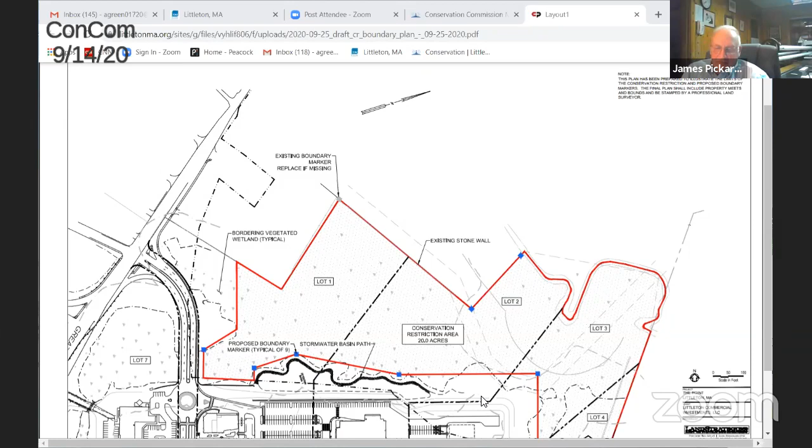Is that something where at some point we'll need to provide a kiosk with a map or something somewhere? I'm just curious. I agree. The one up on the west is way low on my list of places that need signage. And then, what if anything happens along here and into Westford? There will need to be probably a trail sign. I don't think it really needs a kiosk. Okay. Those are my only concerns. Anybody else got anything?

So I think last time we talked a little bit about the Phragmites and the invasives that were taking over. Has anything changed with respect to the ability to address that at some point in the future? I don't know. I'm working on the conservation restriction, Julie, but I will ask the engineer what's going on with the Phragmites. Well, there's no proposal to treat them, but it is, remind me if I'm wrong, Ray, a provision in the CR that an allowed use is control management of invasive species or vegetation management.

Every conservation restriction I write allows for the control of invasive species. So it's an allowed action. There's just no plans right now. Correct. Okay. That was my understanding, that there wasn't a specific plan at this time to manage invasives. I just wanted to double check that the provision was there. So thank you.

Does the brook run through there someplace? I don't see it on the map. It runs pretty much right through the middle of it. Yeah. Is there anything written in the CR that would allow, if ever needed, the town to go in with mats or anything, or to clean up a spill? We had one spill up on 495 a couple of years ago.

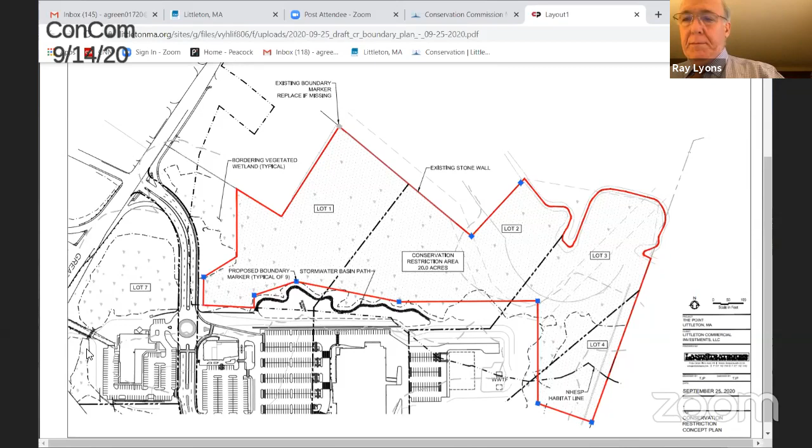So I think, do you need a vote tonight? Or probably should take a vote tonight to approve this? That would be helpful. Sure. Dated September 25th. Somebody want to make a motion to approve this? I'll make a motion to approve the conservation restriction prepared for the point dated September 25th, 2020. And that would be for the plan for the conservation restriction. For the plan for the conservation restriction.

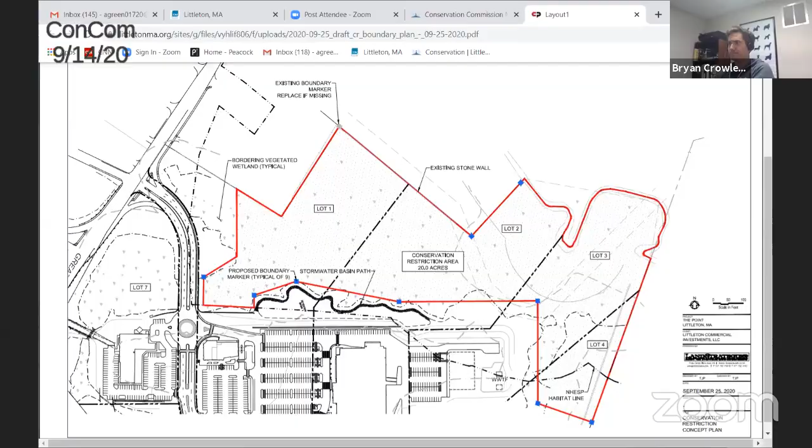Do I hear a second? I'll second. Oh, go ahead. Roll call. Carl, aye. Sarah Seward. Sarah, aye. Jim Pickard. James Pickard, aye. Julie Rupp, aye. Kyle Maxfield, aye. And Bryan Crowley. Bryan Crowley, aye. Unanimous. Thank you, everyone. I really appreciate it. We'll keep this rolling.

Okay. Request for a certificate of compliance, Bennett Orchard. If I may, there is someone here from, I'm sorry, is it the Friends of the Library, who wanted to talk about a land use permit for the storybook. They did one in August, and they're planning on doing another one for basically Halloween.

Katrina, did you want to just run through, is that okay? Yeah, I can definitely talk to it if it's okay. Is it okay to go now? I don't want to mess up your meeting order. Go ahead. Jim, is it okay if we stick her in there? Yeah. Yes. Okay. Go ahead. Thanks, Katrina. Thank you for having us tonight. I know it's an addition to your schedule.

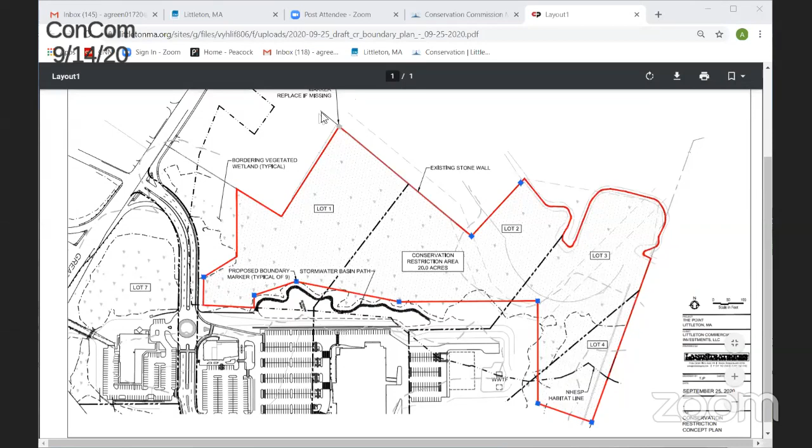Jim O'Neill's also on, and he contacted the Friends of the Library to see if we could collaborate and do another story walk. So last August, we held two story walks, one in Hartwell and one in Cloverdale. So a story walk is where you put picture books in frames and people can read them as they hike the trail. And so Jim proposed we do one October 31st to November 1st in connection with Halloween.

So Friends of the Library would get the frames and put the picture book. Diane Haddock has a Halloween themed book in mind and ready to go if this is okay. And then Jim O'Neill mentioned that LCT was planning to ask people to do carved pumpkins, and they would have some candy at the end to distribute to anyone who participated.

And last August, in all of our advertisements about the story walks, we made sure people knew to wear masks and keep their distance and sanitize their hands. And if the parking lots were full, we asked them to return. And there was a large number of people who we saw, we got selfies from and things like that, who participated. It was really fun.

And so those walks were each one day. And the one feedback we got was that people wished they were up for longer. So this request is for a weekend. So October 31st is Saturday and November 1st would be Sunday. So we set it up on the Saturday and break it down on the Sunday. Out of curiosity, how did the parking arrangements go the last time?

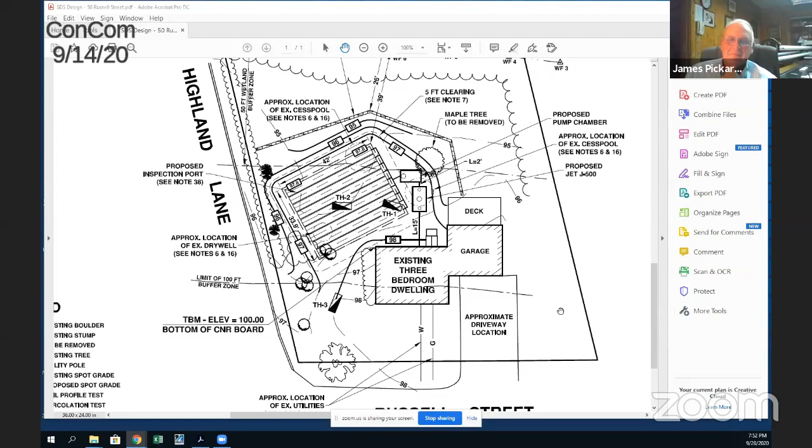Okay, so I'm Kevin Ritchie. I'm here on behalf of Janice Plummer, the owner of 50 Russell Street. She has a failed septic system. She's not moving. It's just been backing up into the house. The existing system is in the groundwater. So 50 Russell Street is across from the middle school. It's on the corner of Russell Street and Highland Ave, or Highland Lane. So we've got a wetland across the back property line. It was delineated by Matt Morrow last spring. We've got the 50-foot buffer and the 100-foot buffer.

We tried to move it outside up into the front yard here. You can see the size of the system's rather large. We did use some advanced treatment. We're using a jet and a geomat both to reduce the size of it to make it fit the lot. Obviously, it doesn't fit in the side yard or the front yard. So we pulled it as close to the house as we possibly can. Here the system is 39 feet from the wetlands at its closest point. We've got some erosion control, some straw wattles and silt fence. And that'll be 26 feet off of the wetlands.

The existing tank is here. It's got a cesspool here, and I believe it's probably been added on to and something out in the side yard as well. I've got one tree in the middle of the backyard that'll have to be removed, and then there are some shrubs down along the side which may need to be trimmed back. Got a couple of little clumps of trees here and here as well that'll be removed.

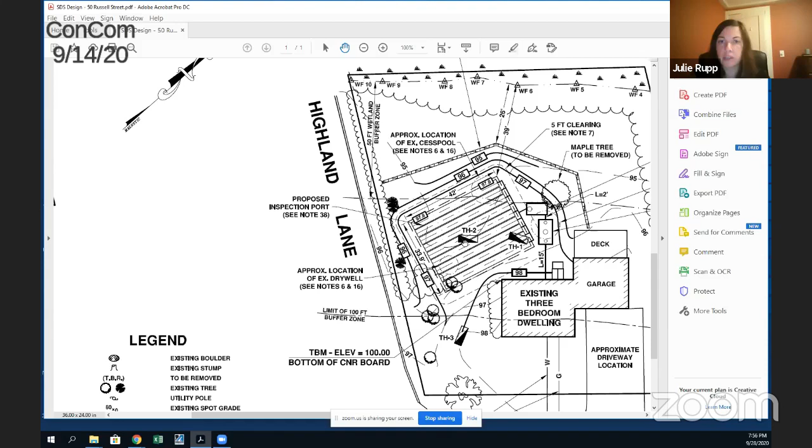So is the mound going to be high enough? I'm just thinking July, I mean, we've been in drought conditions. Yeah, no, so there was about 3 feet of fill on the ground surface. So the water table was in the fill, so we couldn't get deep enough into the natural soil to actually run the perc test.

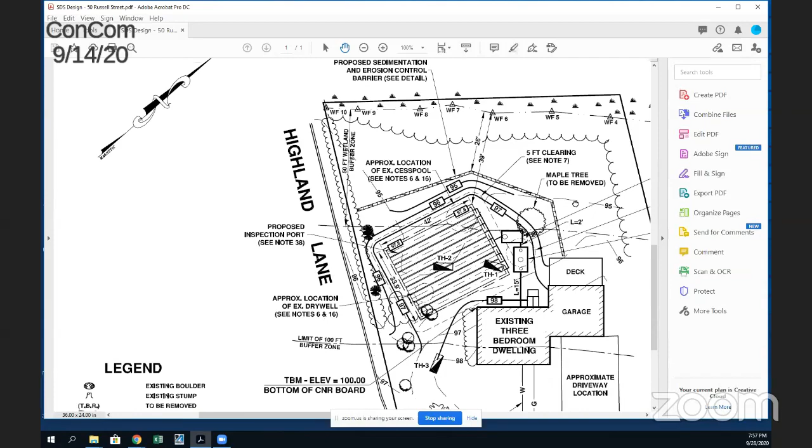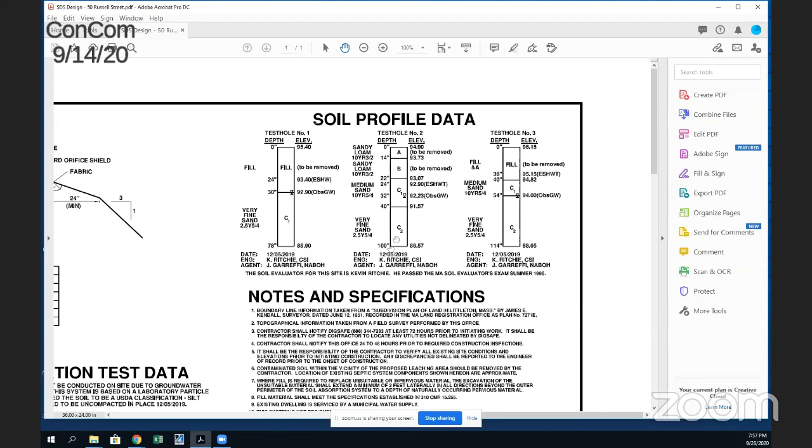The top right corner of this plan, Julie, you can't see it on that, but I pulled it up. It shows the cross sections of the test holes they did. Yeah, so you can see these are the 2 test holes that are in the system. The first one we had 2.5 feet of fill, and then the very fine sand. Here we had roughly 2 feet of topsoil and subsoil. Then we had a sand, but we didn't have enough of it to be able to perc it. So we're back into the very fine sand. Again, that was down below 3 feet. Okay.

So basically, this is a repair then, right? Yes, this is an upgrade. They're not adding any flow. They can't do anything to the house. They're not moving, they're not selling it. They're just having a problem with the existing system. Yeah, it looks like there's really not much choice on this site. No, there's not a lot. It's a big system, and there's not a lot of room. The only room is closer to the wetlands. Right. There's not enough space on the other side of the garage, not enough over here. We thought maybe we could squeeze it in the front at one point, but it just doesn't fit.

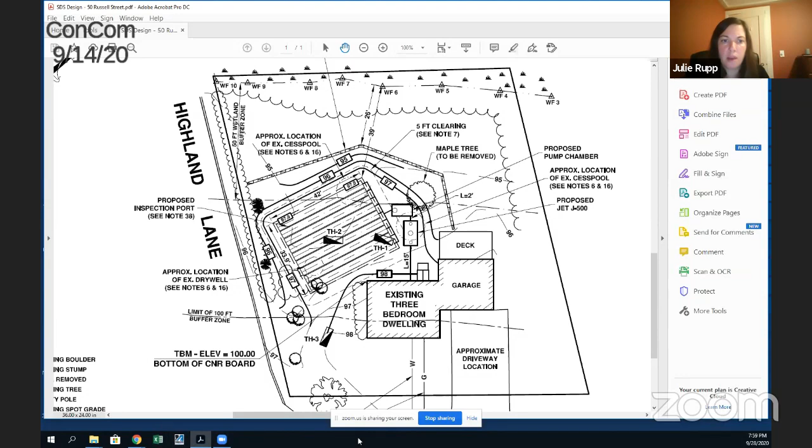All right. Well, I'll make a motion to issue a waiver and an order of conditions for a septic replacement at 50 Russell Street. I don't have the file number in front of me, if anybody wants to... 204915. With that file number.

Do I hear a second from anybody? Don't all speak up at once. Second. Yep. Well, we're muted, so yep.

A roll call. Carl Melberg, aye. Sarah Seward. Sarah, aye. James Pickard. James Pickard, aye. Julie Rupp. Julie Rupp, aye. Kyle Maxfield. Kyle Maxfield, aye. And Bryan Crowley. Bryan Crowley, aye. It's unanimous. Okay.

The only question I got is when do they plan to do this? I think they'd like to do it as soon as possible while it's still dry. So if they could, they'd probably start tomorrow, but they're probably a week or two out anyway. Okay. But Janice is extremely anxious to get it started and finished. I think it may be good timing. Well, the sewage is backing up into the basement. It's certainly time. Yep. Good luck. All right. Thank you. Appreciate it.

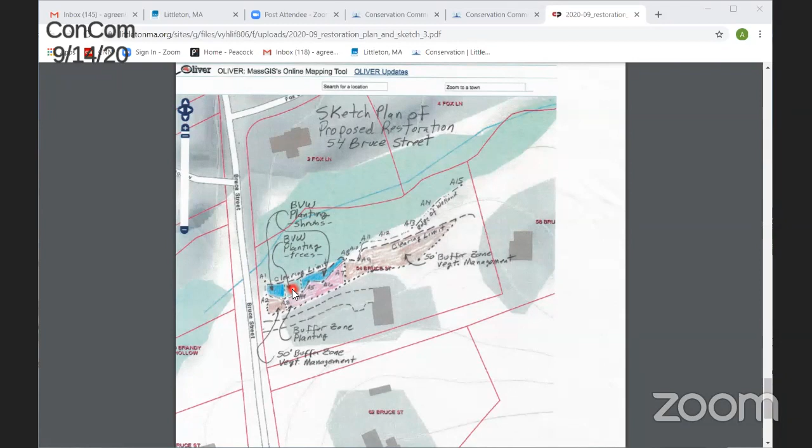And then in that square where it's lighter blue, we're really lacking the canopy cover as well. So in that block I specified planting with some wetland tree species. Then to go along with all of this, in the rear but also in these front areas, I think the key is keeping the invasives out as the plantings and the native vegetation get established, which is coming back in the areas quite quickly.

I was surprised. I was out there in July, I think, and again a couple of weeks ago, and there's some really extensive areas of things like swamp dogwood that have already popped up, which has really only happened over the last several weeks. I think that's my summary.

What's your recommendation, Amy? It looked like a very complete plan to me, and it does include some long-term maintenance, which you can see in there too. So the order would have the continuing condition that he can go in and do some pruning and cutting and removal of invasives as they continue to pop up. Yeah, I would think they would have to keep on top of cutting the invasive stuff. That just keeps coming. Anybody else got any comments?

Yeah, I agree that controlling the invasives is something we want to help allow. I'm just wondering if any education has taken place on which plants are the invasives, just to make sure the homeowner doesn't run into issues again, because they thought they were doing something beneficial and didn't realize. So I'd like to suggest that maybe Chuck could provide a show and tell, or if it's part of the maintenance, or maybe the first time it's time to prune invasives, we go look and clarify what's what.

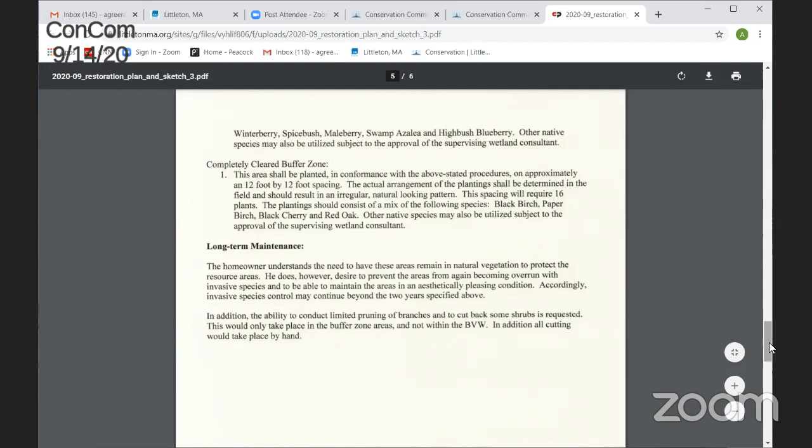Well, we're supposed to get an inch of rain Wednesday? Mm-hmm. I think that's what's in the forecast. Yeah, tomorrow night into Wednesday. Yeah. I hope we get it. Even though I just painted my deck.

What do you want to do, folks? Okay this and keep tabs on it for 2 years? I think that sounds reasonable to me. Carl? Right, I agree. Yep. So you want a monitoring report at the end of the growing season? Yeah. Yes. And that Mr. Karen be present during the installation? Sure. I think that makes sense since it's his plan. Somebody want to make a motion to go forward? Let this go forward, please.

And I guess this needs a waiver too. I guess, I don't know. I suppose it does. For restoration, and working within 50. Come on, folks. Somebody make a motion, please. You can say so moved. So moved. There you go. Hear a second to it? I'll second.

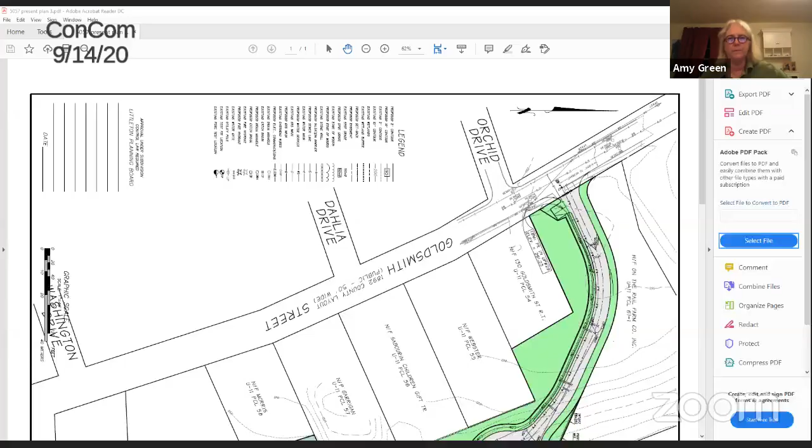Hopefully at the bottom of your screen, it should say share screen, a little green. Yeah, I see share screen. So if you click on that. Okay, here we go. And then once it's up on your screen, you can click on it again on, there you go. Okay, but I think maybe what I need to do, does that help? A good start. We'll get a picture here anyway. Can you see what I'm looking at?

Yes. Okay. What you can see there, what's colored in is what was originally submitted with this order of conditions. So what is cross-hatched is what we're proposing. And there are these 3 lots, lot 3, lot 4, lot 5. Lot 3, the house you can see is enlarged a little bit, but it's taken no closer to the wetlands except for where the deck is. There was no deck shown originally. It's still beyond the 50-foot setback.

Lot 4, you can see the increase in the size of the house, and the distance to the wetlands originally was 71.9 feet. That was the closest distance that the proposed house was to the edge of the wetlands. Now it is 57 point something. Let me blow that up a bit.

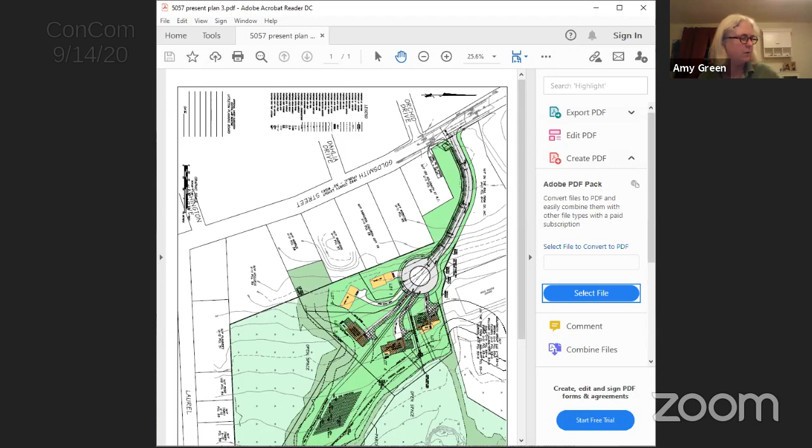That'll be fine. So do you want to send that to me? Yeah, Steve, if you want to look at that, I think we are concerned with things such as sheds and fences. If you want to take a stab at that, that would be appreciated. Okay, I'll take a look at that. If you can just send that to me, Amy, or just tell me where it is. Is that in the bylaw? In the regulations, at the end of the regulations. Okay. All right, I'll take a look at it. If I can't find it, I'll call you. Let me know. Okay. All right, great.

So in the meantime, I'll be allowed to at least submit my plans. If there's any concerns from the commission, then we'll just go on hold. Okay. Great. We'll see you on the 19th.

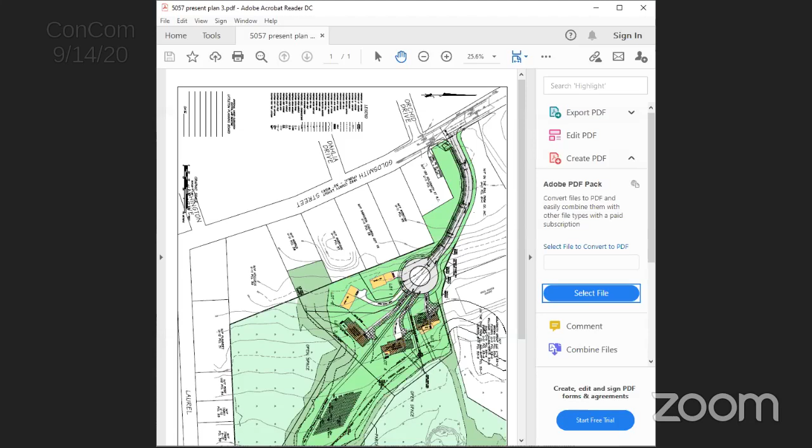Okay. Public hearing, notice of intent, Ayer Road, Mass DEP file number 204-914, MassDOT repair eroded gully. Somebody want to speak to that? Yeah. Hi there. My name is Susan MacArthur from BSC Group, and I'm here with Matt Farron from MassDOT.

At the last hearing, the commission had asked if MassDOT could go out and take a look at the catch basin that's located across the road from the area that's eroding, that gully, as well as the catch basin that's located down the street near the development on the hillside. And so they did, almost 2 weeks ago. They went out and pulled the catch basin grates and looked in, and there are silt sacks in there.

So, that does restrict a little bit of flow, but they were working. So they cleaned them out. They did jet water through to see if the pipe was functional. That does go underneath the roadway and outlets at that slope where the gully has formed. And they did find that it is coming out there. They just couldn't find the end of the pipe, so it was just kind of seeping.

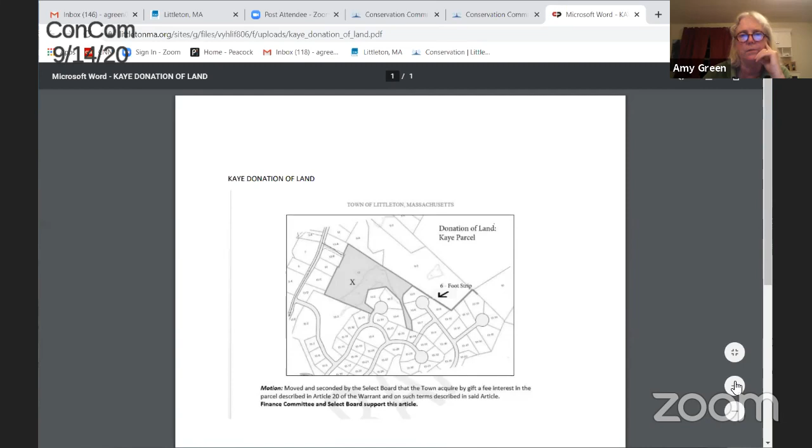The Durkee and Kaye land transfer, I don't think I do have that. It's kind of weird. The Durkee land donation is pretty straightforward. The Kaye land donation, this is Fir, which was phase 1. And then this is Douglas, and that's phase 2. And then phase 4 is down here somewhere. So they'll be donating all this, pretty straightforward. But they're also donating this 6-foot strip of land. And it was in kind of rough shape after construction and they weren't doing anything with it.

So I actually was able to walk it with them on Friday and get them to remove some of the really rough wood chips, and they're just going to reseed it so that if we do need to make that into a trail, we can. The other piece is there's supposed to be an easement right here for a bike trail. And it's really not graded out. It's like right outside this guy's basement door. So there's discussion now of whether they will put it in as Maurin believes the planning board permit read, or if they would leave a bond so that the town could put it in later. Either way, I'm sure that owner's not going to be happy, so I prefer they did it.

But wouldn't it make more sense to have it exit up near where the arrow is, that short piece of property into the circle? Down here? No, up. Oh, up there? Yeah. That's really steep slope. Okay. And it's too late. The easement is set. I think they need to do it. If they opted to put a house too close, I feel as though they should deal with that.

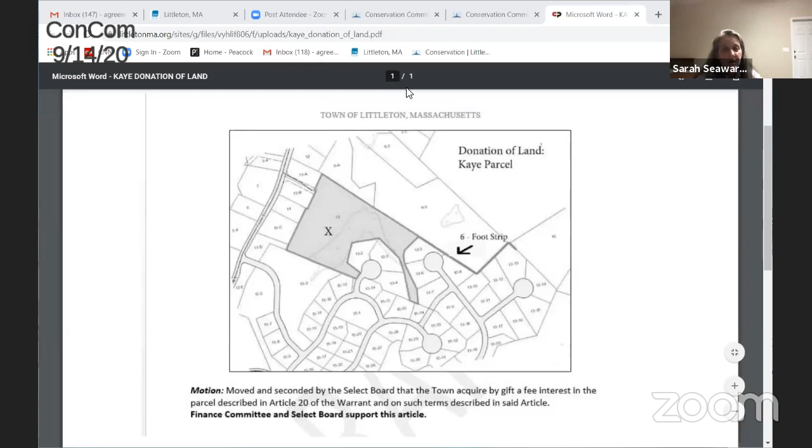Okay. Yeah, and if there's something that's not adequately documented, they're at risk for not being able to substantiate. I'm hoping they have it all surveyed like it's on a plan. Yeah, that makes sense, Sarah. They can plot the house, plot the property, or existing foundations anyway. Right. I don't know if they have lot 40 surveyed, but they have the other 2 surveyed. Okay. All right, I will let her know. Okay.

Do we need to go to the Scott Road update? Well, that's at 9:15. So, yeah, back again on the meadow mowing and haying stuff. Let's start with the mowing thing or the hay licensing. I don't care. I don't know if I just keep this on here. Yeah, I mean, on the agenda for discussion, or? Yeah, just keep it there. Okay, table it.

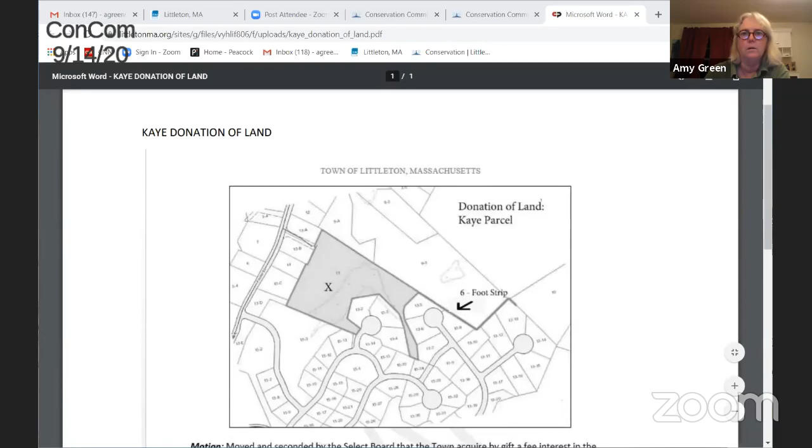How are we doing time-wise, Amy? It's 9:10. This isn't a public hearing or meeting, so you probably could go ahead. Is somebody here to speak to it? Matt is here. Matt Morrow. You guys hear me okay? Yep. Okay, great. Before I get started on that, Amy?

Yep. The Grove Road situation you were talking about, I know the area. I evaluated a parcel for another client of mine. When I looked up records for the surrounding lands, I actually have an address for somebody in Seattle, Washington. Don't know if you found that. I don't know how you found that, but no, I don't. I'll send you the person's name and address that I have on my records from my record search. Is that the one that's next to 8 Grove?

Well, you've got 8 Grove, then there are 2 parcels owned by the client I represented, and then there was the one parcel that fort you were talking about is on, right near the town land. I have the name and address in Seattle, Washington for that parcel. Oh, okay. The first 2, the ones that abut 8 Grove, were the ones I was looking for. Okay, I can give you that too. There's a law firm out of Vermont representing the estate for those 2 parcels, and I can give you that contact information as well. Perfect. Thank you. You're very welcome.

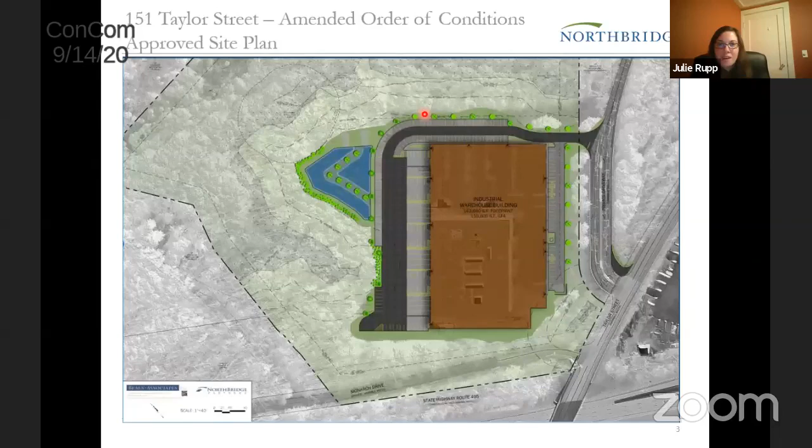Yeah, we talked about that corner quite a bit. Yeah. Well, actually, it's not for the tractor trailers that we need the swing. Right now, the way this facility works is the delivery vans actually drive into the building and load in here, and then they come out and drive through this way. So what we actually did is we pushed this out a little bit to allow the vans a little bit more room to come out.

Because if you recall, up in that corner, we originally had parking on both sides. So you don't need as much parking now with the offsite, the sister facility, basically? Correct. So when we get to that, I'll show you where we've relocated some of the parking down on that side. So, Todd, I think we had talked also about a little snow storage in that northern corner. Just move your cursor to the left a little bit.

Right there? And in the corner, on the outside edge, I thought as well. I don't think we have any out there anymore. Okay, because we had talked about covering some parking spaces or something. Yeah, we maintained snow storage here, and then graded this such that it comes back onto the pavement, so it won't go in here. What we want is any snow melt that comes off hits the pavement first, gets in the catch basins, goes through the sediment removal before it gets into that infiltration basin.

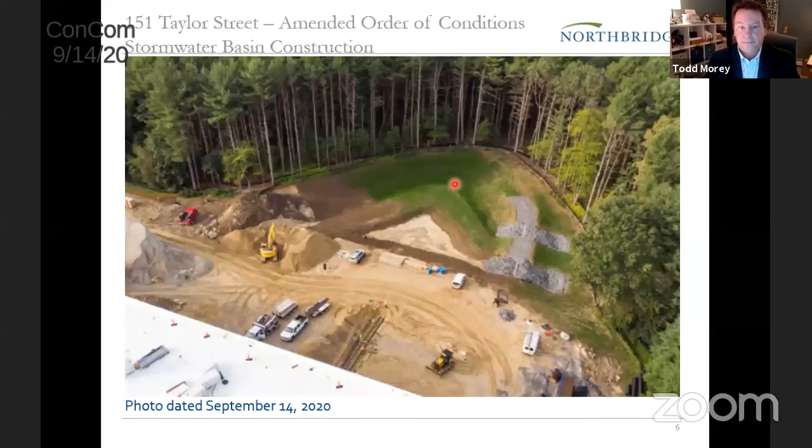So 151 Taylor Street. Why don't we take care of the amended order of conditions here first, if we can? Would that be reasonable? Seems reasonable to me. Amy? It's up to you all. I was just thinking about whether or not they don't want to have this amended order of conditions voted just yet until they're sure they're getting the other side, or if they just want to plow ahead. Okay, I guess we just move along. But that's up to the applicant as much as anything else. All right, go ahead.

I'm not sure we have a preference one way or the other. I know you have to do paperwork on these, Amy. We can defer it, or we can take care of it right now. Well, one thing I will say is if you wait for 153, you might wait another 2 or 3 weeks before closing. I'm fairly confident you're not voting on 153 tonight. Especially since we don't have the peer review back, and I don't have the DEP file number. So there are procedural things that need to be taken care of before we get there.

If you choose to vote on this tonight and it is approved, and for some reason 153 doesn't get through either you folks or the planning board and we have to revert back to the original, I would like to believe that's a fairly light lift. But again, you're the voting folks on the commission, so that would be more of a decision for you folks.

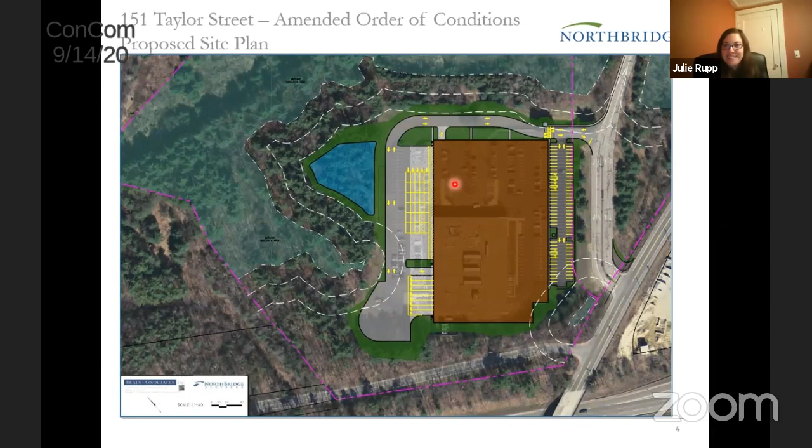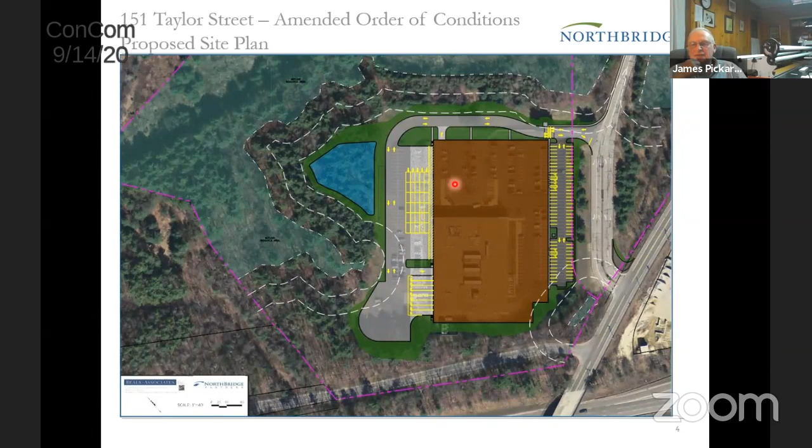Right. Yeah. It seems like keeping it all together makes more sense, because what if some discussion on 153 brings us back to something here? Let's keep it open, and my understanding is the projects seem to be interdependent. You just lost a whole slew of parking, so they are dependent on one another. Yeah, as you will see in just a moment, or if you recall the August 19th discussion. Well, why don't we just go ahead with your presentation? Sure.

We've delineated the wetland resources in and around the site. It was a fairly simple delineation, considering that this site was filled in the early to mid 80s. There's a fairly sharp slope that comes down off the parking lot, and the wetlands are sitting on the toe. So this is a very clean, very simple delineation. Last time I was down there was about a week and a half ago; the flags are still all up, sequentially numbered. We have an A series that starts next to 151 Taylor and runs down to this point, a B series that starts here and runs around, and a C series that starts over here and terminates about there. So there's really 3 series of flags.

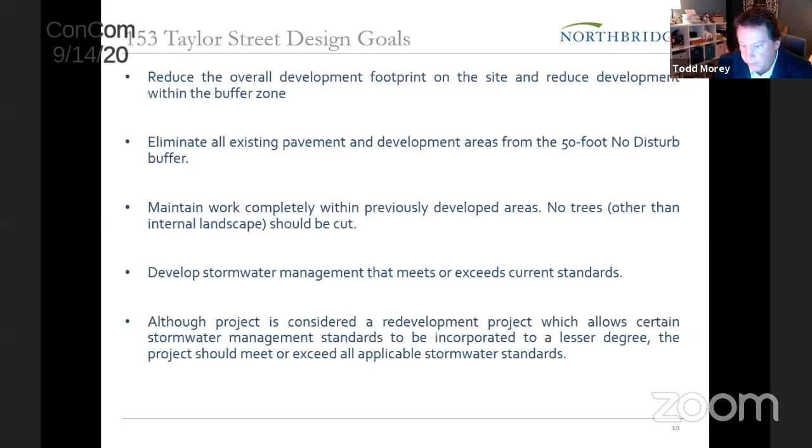Under redevelopment standards in both the Wetlands Protection Act as well as the Mass DEP stormwater standards, there are certain areas where we can just meet it to the extent practical. We didn't really feel it was appropriate to hide behind that. We wanted to make sure that we actually met the standards that applied to this. As you're also aware, we're in an aquifer groundwater protection district as well as being proximate to wetlands here. So we felt that was the right thing to do.

And then we've also removed additional area out of the 100-foot buffer zone. That's almost an additional 12,000 square feet. Then once you include the areas that are not in buffer zones where we removed development area, we're just over an acre reduction in the development footprint for this proposal than what exists out there today.

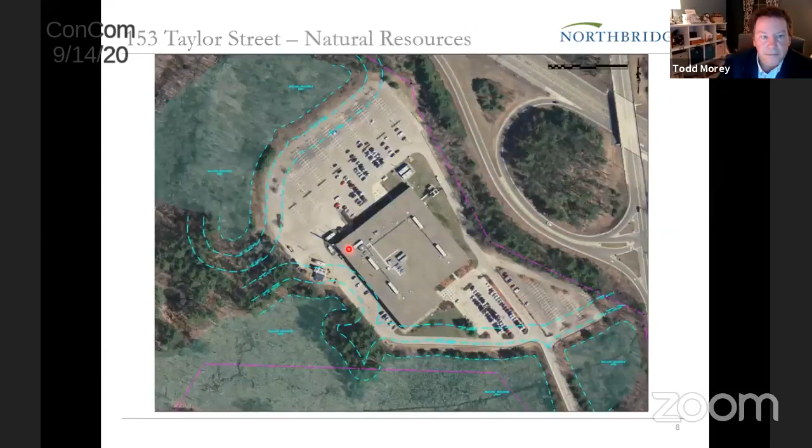The one exception was we did one right off this edge here, right about in here, and we were getting the white sand. If you recall from a long time ago, the presentation we did at 151 Taylor Street, there was an area of white sand that came out where the infiltration basin is. We did find another vein of that. We also thought we might find it over in here because we were hitting some of the more natural soils instead of the fills. But no, we didn't.

We also got this same type of soil, so it's remarkably consistent all the way through. The other thing that we noticed there was that we were excavating anywhere from 9 to 12 feet down with the machine that we had. There was zero trace of groundwater. There were no mottles. There was certainly no standing water. It was just clean all the way down.

There were 2 monitoring wells on the property that we opened up. These were not Littleton Water District monitoring wells. They were 2 that were installed right around a fairly large subsurface wastewater disposal system. One of the wells we measured at 14 feet 0 below ground surface, and the other one was 14 feet 2 inches below ground surface. But again, that was in July that we did those. But I think the lack of redox features in the soil was more indicative of no groundwater in at least that top 12 feet.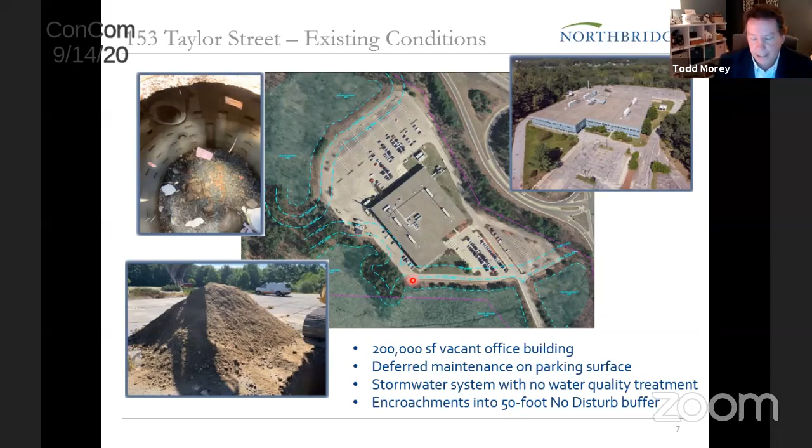When we were delineating the wetlands, we found a couple of small places that look like they may have overtopped occasionally, one in this area and one right down in this area as well. But it looked like it was very infrequent. There was no scour. If I had to assign a storm to it, I would say maybe a 25-year storm. But I think the vast majority of stormwater is infiltrated on the site today, and that's what we wanted to do for our future condition.

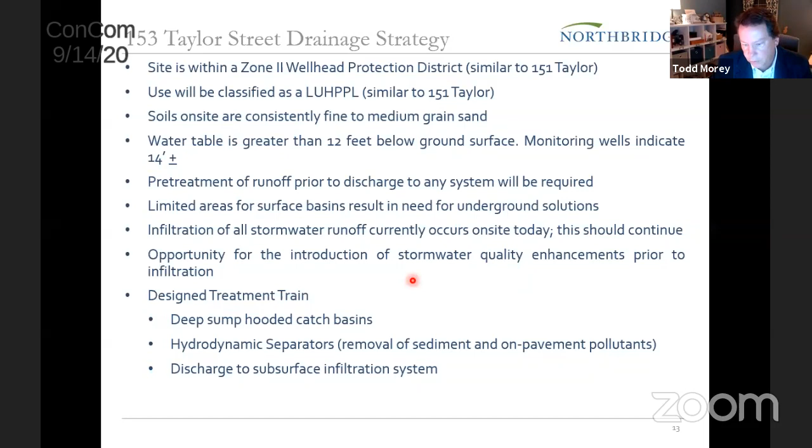We also recognized the opportunity for even more stormwater quality enhancements other than just the pre-treatment. So what we came up with for a treatment train was catch basins that are deep sump and have hoods, unlike what's out there today. We decided to use hydrodynamic separators because we wanted to get the stormwater underground and into the underground infiltration systems. And then all the stormwater is directed to infiltration systems across the property.

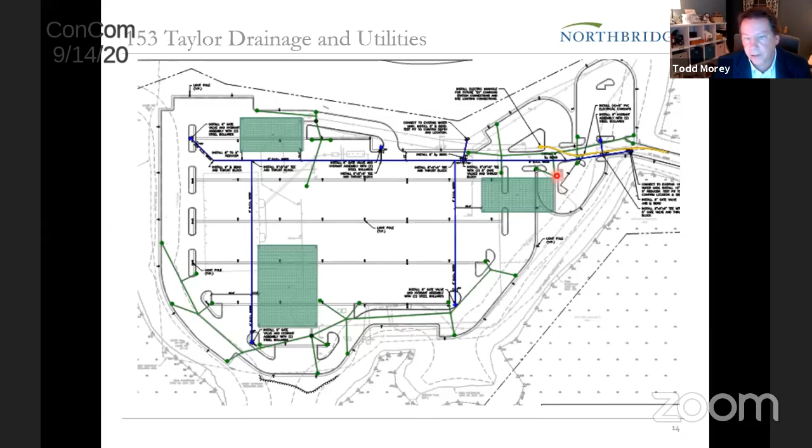The green that you see scattered about are standard catch basins. Every once in a while, you'll see a dark blue dot. That's one of our TSS removal systems. And these big green boxes are the underground infiltration systems. We've scattered them throughout the site. Instead of just trying to load up one side or the other, we thought it would be better to spread it out.

And then, going back to what we had for original design goals, I think we've achieved all of the goals that we set out to achieve in doing this. As I mentioned, the proposed layout does reduce the overall development footprint by over an acre, and we're over 35,000 square feet in the buffer zones. We took all the pavement and development area out of the 50-foot buffer zone.

We are proposing to revegetate that. We're not going to do any significant grading. It's really just going to be placement of trees as well as some meadow type grasses. And we want those grasses to be the type that really don't require maintenance. We're not trying to turn this into a lawn. We stayed completely within the previous developed areas. We're not cutting any trees around the perimeter of the site.

We were able to introduce water quality pretreatment as well as overall water quality measures. And we've provided a stormwater management report that shows that we meet all of the applicable standards in the Massachusetts Stormwater Handbook. When we talked on August 19th, there were two issues that we quite frankly didn't have any answers for at the time, and we told you we would go back and take a look at them. One was thermal impacts, and the other had to do with road salt.

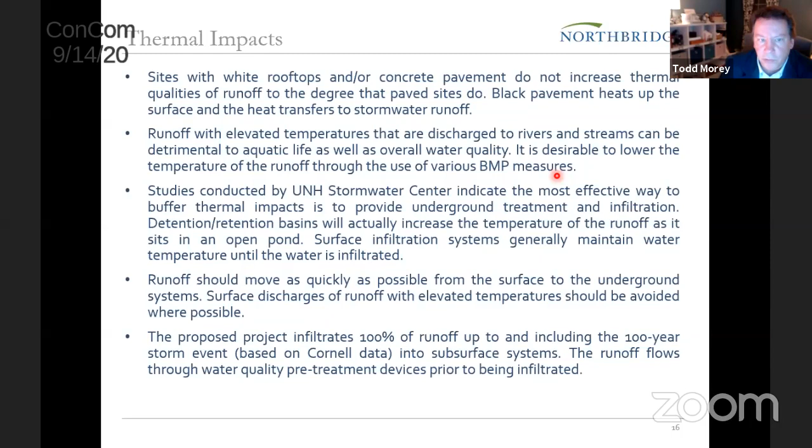The road salt was a little bit more difficult to track anything down, and then we got in touch with, I botched his name, and I'm gonna have to apologize for that, Corey from the Littleton Electric Light and Water Department. He's the water quality manager over there, and he provided us with some monitoring data from not only just around the community, but as well as the individual monitoring wells that the water department samples that are located on 153 Taylor Street. They also have a couple on 151 Taylor Street as well.

He did say that the town has a lot of various impacts with road salt. It's likely due to Mass DOT. You have a lot of major roadways that run through town that are probably heavily salted by Mass DOT. They've been trying to think about different types of ice melt chemicals. A couple that he pointed out were calcium or magnesium chloride, but those do present other issues with water quality. You either elevate calcium levels, you elevate hardness in water.

And quite frankly, with some of the additional research I did, which seems to always point me back at Minnesota DOT, they found the same thing, that the only other chemicals they had been able to find were these two, and that carries their own series of issues. So it seems to come back to having a good handle on what your application rates really are and trying to time it with the storm.

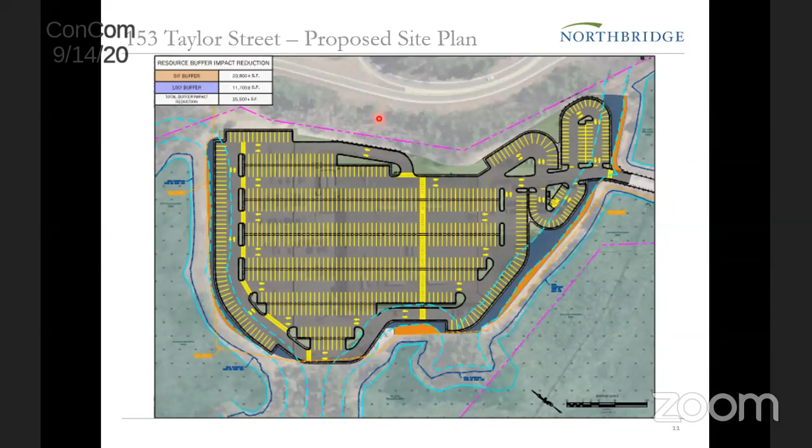Okay. I guess we've got to move along. Has anybody else got any more questions for now? And one other thing I'd possibly throw out, and I don't know if this would even work, if you're concerned about the salting, I don't know if it could be part of the O&M, that there'll be an annual training or whatever for whoever the contractor is, or pre-season or something like that.

Yeah, and I was thinking about the monitoring wells that exist could be put to use too, but let's see if there's some. Yeah, I think I would assume they read those regularly. I received via email one of the readouts. I think it was from the well that's right here. So he did mention that this was not one of the hot spots in the community, but it is right at the intersection of 495 and Route 2. So it has the potential. That's for sure.

I see that. Yeah, but it's already been an existing parking lot, so it probably has been salted and sanded in the past years, I would think. Nobody wants the liability of somebody slipping and falling. That's true. That's where it all comes down to. Yeah. But anyway, Julie, to your point, the 4 monitoring wells are all generally in this area here. They're actively tested by the water department.

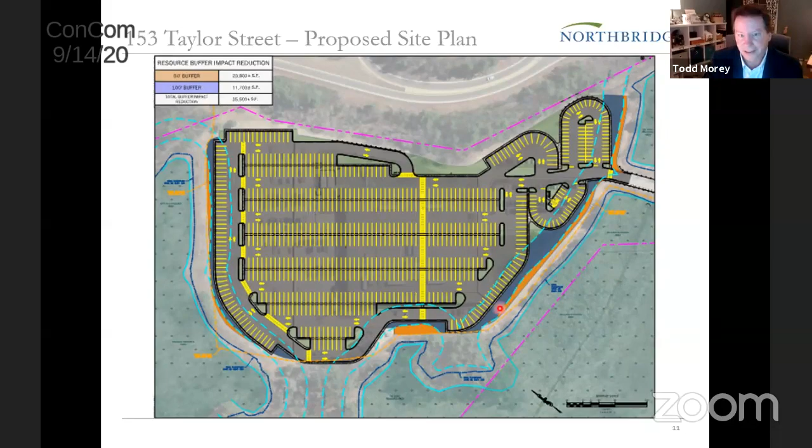So, do you know which way is down gradient? That's what I was just gonna ask. I can find out. Okay. I imagine if they install them on that side of the site, that it must move that way. Yeah, let me see if I got an overall here. Yes. So the ones at 153 Taylor are down in this location here. There's a couple at 151 that are here. So I would assume that means they're looking at it going this way. But I'm not going to say that with 100% confidence. But I can certainly find out.

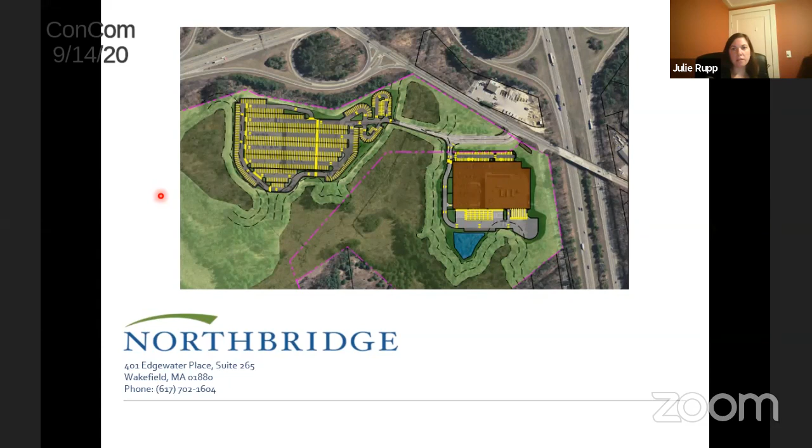And Todd, it looked like in some of the slides, you said you used the Massachusetts required stormwater standard. But then a few slides later, you mentioned the Cornell numbers. And so those are 2 different standards. So I was just curious which one you were using. For the runoff calculations, we used Cornell. Okay. The standards that I was referring to are the 10 standards. Okay. I was just saying, I'm looking at the report right now, and they do have tables of the storms and what rainfall data they use. It's all based on the Cornell. Okay. Thank you.

So on my to-do list, I have cost for parking deck and the carports, a little bit more definitive than the metric, as well as do some research on the direction of groundwater flow, which I'll contact the water folks and see what they have for information on that. Hopefully by the next time we talk, we'll have a DEP file number, and I will have the results of the peer review in hand, if not mostly resolved, but it depends on what their comments are. And whatever the planning board decides, that's great. But hopefully we know that on Thursday. I think we're with them at 7:45 Thursday evening.

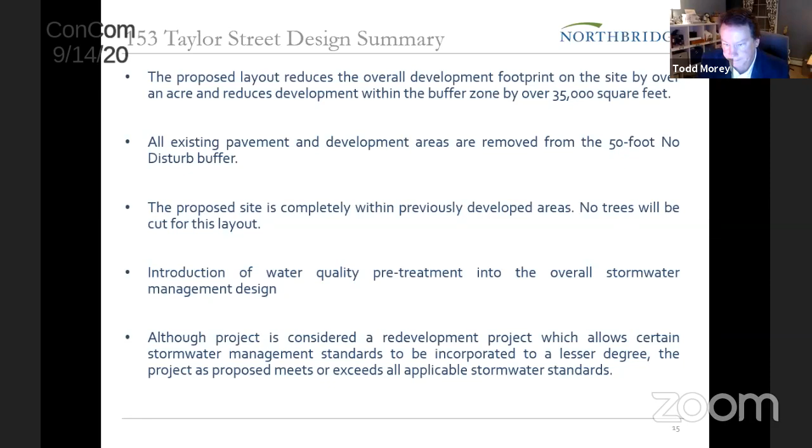Okay, we got to move on. We got still 1 or 2 more hearings to do. So continue to October 19th. Thank you very much. Okay. Discussion. 628. Thank you for coming in.

Hello, can you hear me? Hello? Hello. Hi. Yes, we can hear you. Yeah, hi. So I didn't know this was gonna. I mean, I've been waiting since 9:45. So anyway, so I wanted to talk about.

Initially I wanted to put up a shed in my backyard, but I'm not gonna do it this year. I also decided it's not practical to put it where I said I'd put it, because I'd have to wade through knee deep snow to get to a snow blower. So I'm going to move it around. So I'll do it next year. But the one thing I want to talk about today was about

paving my driveway, really. I talked to all of you, I think like a year and a half ago, because I have a gravel driveway, and we've had a snowplow come in during the winter time. And now most of the gravel is gone and the driveway is actually sinking. So I don't know if it's going to hold out for one more winter. So I was looking at paving the driveway with permeable pavers. So I've sent some pictures of the pavers that I plan to use, and I've sent the specifications of that.